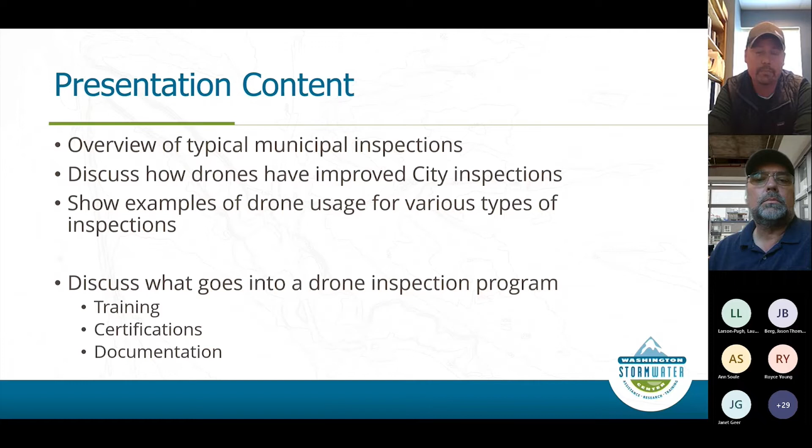So I'm going to talk about the first 3 bullets here, and Darren's going to go ahead and go into the details on what goes into the inspection program, since I'm not a certified pilot for the drone program, but Darren is.

With that, I can talk a little bit about some of the typical things we do. We use drones for improving our inspections for our construction stormwater general permits, our industrial stormwater general permits, and our municipal permit inspections that are required. We also have dams in the city of Port Orchard, so we use these for our periodic dam inspections, once for the annual and for anything periodic after large storm events to make sure we don't have any issues with structural integrity of our dams.

Like I'd said previously, we do use the drone on occasion for environmental issues. We've had some storm events where we've found streams downstream of the city that have had issues with inundation from sediments. We've partnered with local jurisdictions to fly the drone over a watershed to try and determine if there are point failures on slopes where there may have been a landslide, if there are issues potentially caused by development, if we've impacted wetland processes, or if there's been any issues in streams, et cetera.

We also use these for flyovers for capital project inspections, and it's actually a really cool tool to use when talking to your council or commissioners, because you can show them pretty quickly aerial footage of progress with capital improvement projects. We had some great ones that I didn't include in this presentation, sequencing a lift station, a major lift station that we installed within the city. We just kind of folded imagery over and over for progress on the project, and the council was very pleased to see that.

So traditionally, when we first started here, Darren and I started about the same time. When we started with the city, inspections required a ton of footwork. We would come out on a site, usually for a clearing limit inspection or pre-clearing erosion sediment control inspections. And it was muck boots, sometimes waders, depending upon the conditions, and lots of walking with notebooks and cameras in rain, sometimes in sun, depending upon the season.

What we noticed over time with the increase in the number of permits coming in, we were having a harder and harder time staying on top of our inspections. The NPDES municipal permit requires a minimum of a 6-month inspection for construction. And we were finding that the rate of change on these sites was happening so much faster than that 6-month minimum requirement. We were having to get out there more frequently.

Some of the stuff that we were helping ecology with for construction general permits was improved by these drone processes as well. We could send emails giving informational updates to the ecology inspectors to keep them in the loop on things that may or may not be progressing on these sites.

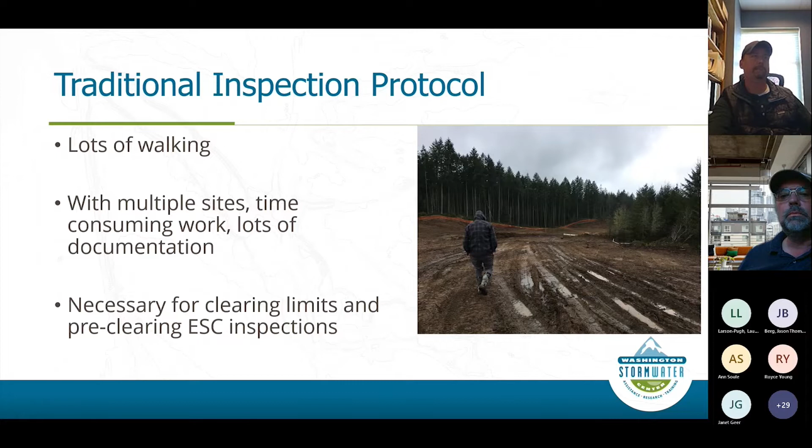So in a nutshell, using your drone can really help with improving your inspections and the data that you collect from them. We don't walk every time. We go out usually for clearing limits inspections, and after they clear, we'll do another site visit, either a drive-through or a walk-through. But on periodics for us, we go in and we use the drone.

I do need to give the caveat that a drone flyover does not substitute for a formal inspection for your municipal permits. You still have to go out there, you still have to document your field observations in the forms, and we use the Herrera documentation for construction inspection that is available online as well. I believe it's at the Stormwater Center, and I think there's a few other spots on the ecology website where you can get that documentation.

And we just changed the logos on it and updated a little bit here and there for what we include in those inspections. The cool thing is you can cover a ton of ground really quickly, and you can see subtle changes pretty easily from the aerial footage on the plat as a whole or the individual construction sites.

To give you an example, that 104-acre lot or plat that I was telling you about at the beginning of this usually would take us about 4 hours plus to do an inspection on foot, because they didn't want us driving on their site since we had the potential to create erosion by taking our vehicles on site in certain areas. So a lot of it was footwork—4 hours to 6 hours in some instances, depending upon conditions. The drone flight took that time down to 9 minutes.

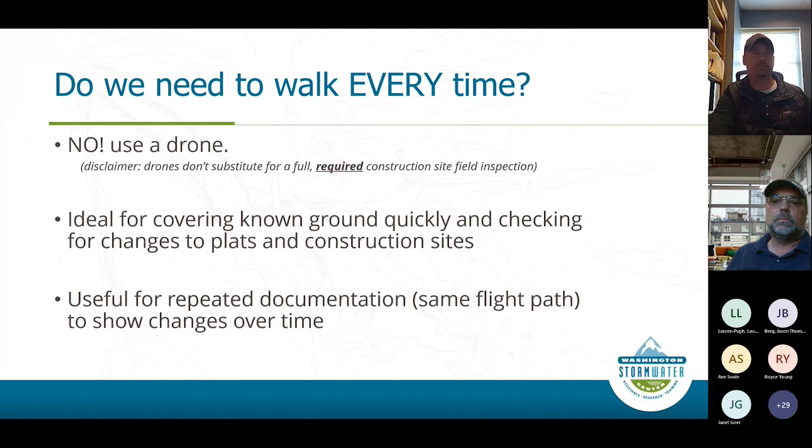So I've talked a little bit about how drones have improved our inspection program, but again, back to time use and efficiency, we can cover more ground quickly if all we have to do is go out and do a 9-minute flight on a big plat. We have several large plats with open ground right now that we can't always do those big site visits. So it helps us prioritize which ones need more frequent follow-up, which ones are doing really pretty good, and we can just let them do their thing.

It helps us with documentation because we can get those videos, we can get those photos. And the combination of individual lot inspections from the air really helps when we can do it at the same time as a larger plat inspection.

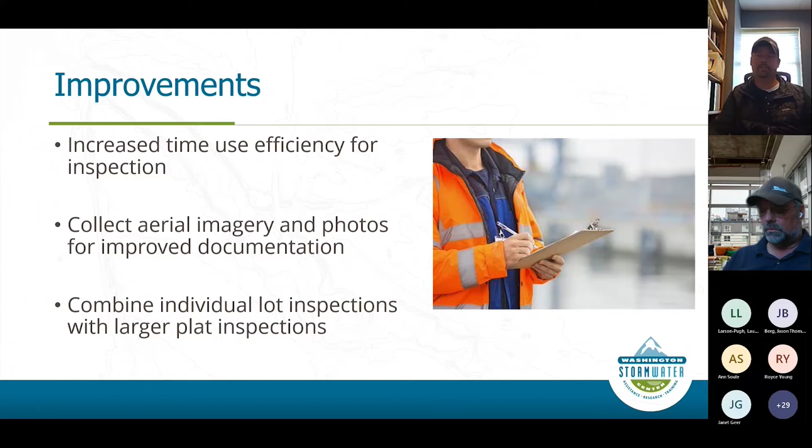A lot of these guys have switched on our individual lots with these types of plats to using pumper trucks, so they don't have to back their trucks in and out on these driveways. They just boom out and fill a lot of their foundations from the main roadway.

So for us, we like to see this because after the fact, when they finish up all these lots, they come in and do that final lift of asphalt, and we have a really smooth, seamless driveway and road system through this plat that looks good, isn't chewed up by development, and it's more beneficial for us in the end for the product that we get.

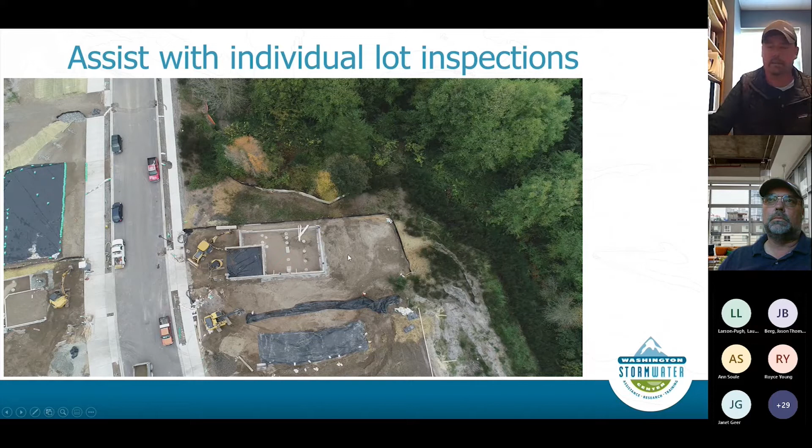This is that same plat. The image that we were looking at is around the corner here, but you can see there's kind of sporadic development going on throughout this plat. So for us to do a full plat flyover, it really gives us more of that holistic view on where they're at, what the phases are going in, what different phases are changing for the development here.

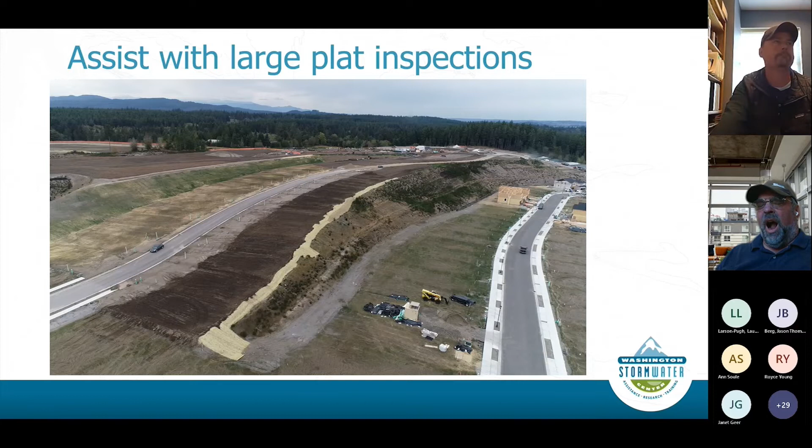And we keep that log to supplement those periodic inspections that are required by these permits. We also use this for outreach to the contractors to identify red flags.

I mean, you can see right here, we had a storm forecast for a couple days in advance of this, and these guys weren't able to get the water out of their pond to discharge it. But the rain events that came in, as you can see here, with a 192 NTU sample out of that pond, that's a big red flag for us.

So we got on the phone with these guys and said, you need to find an alternative method because your BMPs are not meeting the criteria for what's showing in your pond here. I mean, the prescriptive says if it looks like chocolate milk in your pond, it's pretty soon to come out of your pond as chocolate milk to the receiving water as well. So they had to do something.

What we found out after the fact with these guys was, based on their construction activities, their source control was - they did a risk assessment on this and they let their source control kind of lapse.

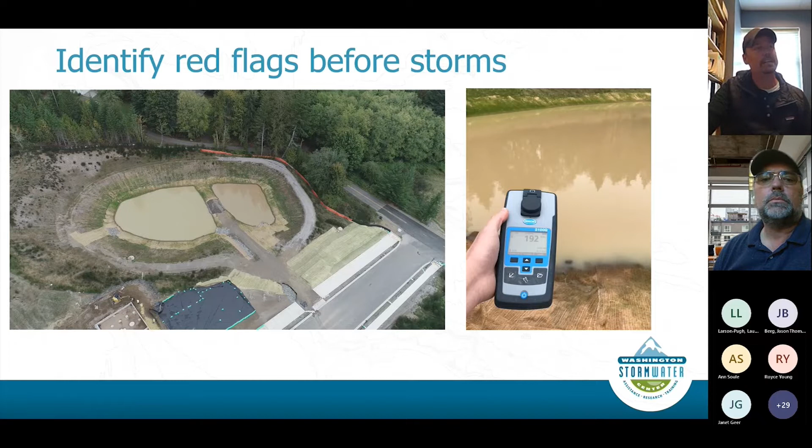We had a small rain event that incorporated a bunch of turbid water into these different ponds. So what these guys did was they kind of panicked and said, what do we do? We told them the menu for the stormwater manual has lots of BMP options, but in a situation like this, with the size of this plat, you guys may want to do some kind of filtration system. So they went out and picked up a Chitosan system within a couple of days from United Rentals, and they were able to get it on site to manage the water in their ponds using treatment to discharge and meet the requirements. So for us, it was really a useful tool to get in front of problems.

We did talk with them fairly frequently to maintain where they were at. Their treatment staff was keeping records of all their treatment processes, when the pumps were running, et cetera, so we were able to check on it frequently. After the wet season, they were able to amend and fix their source control issues, and the problem has abated itself.

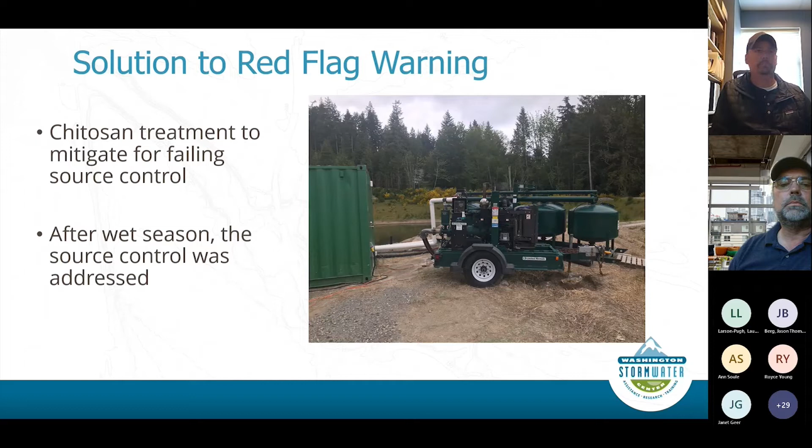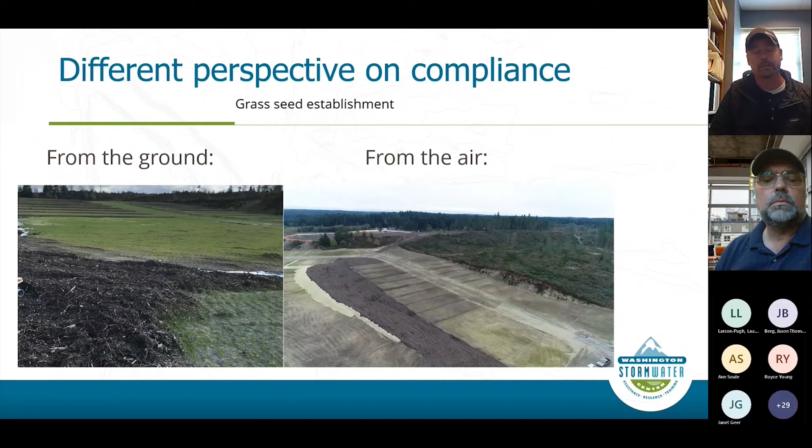One of the other benefits of using these drones is perspective. You can see in the picture on the left, when we're on the ground and get out of a vehicle looking at the different lot layers here, the different pads for these lots at rough grade, it looks like that grass isn't too bad. But when we get the drone up over the top of it, you can see that it's much patchier and more sparse than what we can really see without getting out there and walking each individual lot. So having a quick flyover really benefited us to say, hang on guys, you need to address this. We're going to probably need more hydroseed or an alternative BMP to get you guys in compliance with where you need to be.

Some of our other types of inspections we were talking about at the beginning, the dam safety inspections. This is one of our registered dams in Port Orchard. It's a stormwater pond, but it meets the criteria of a dam because it has the potential to withhold 10 acre-feet of water in its design. By that, it's considered a jurisdictional dam by ecology, so we have a whole different protocol for how we manage and maintain this facility, and we have to do these inspections frequently. There are several other jurisdictional dams within our city, but most of them are managed by private facilities, and they aren't high hazard dams like this one.

As you can see here, we've got a housing tract that was built in a different jurisdiction just downstream of this wall. The water runs off stream here to another receiving water downhill. But in the event of a failure, we have to have a lot of contingency plans to protect this downstream plat from issues that could occur here. So with high risk comes a lot of inspection, a lot of engineering, and a lot of oversight.

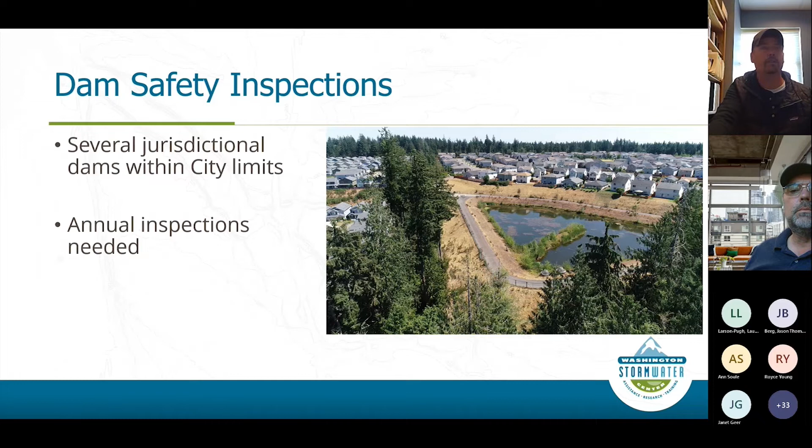For the dam safety inspections, I can send ecology an overview with a close hover over the top of our two control structures, our inlet structure here, and our secondaries along this berm. You can kind of see one here and one here, showing the integrity of both berms. So they can see not only are we submitting our inspection reports, we can also submit these documentations so they can cross-check it against what we've kept in our notes. It's been really helpful for us with these submittals.

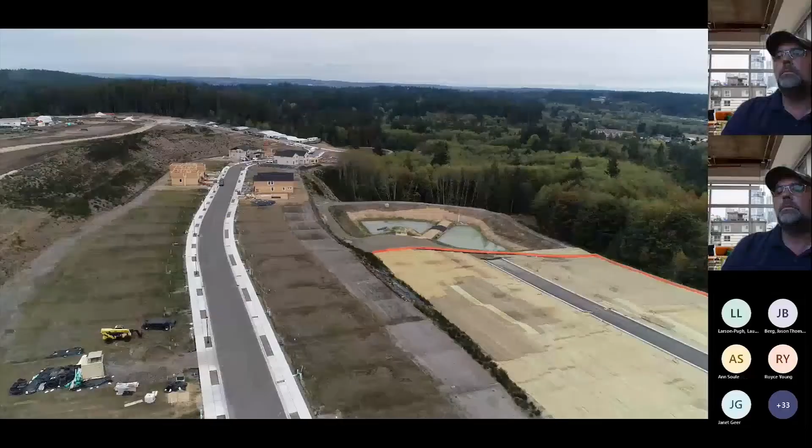Let's take a look at one of those large sites we were just talking about. This one might be a little slow moving, and I apologize in advance, there's a bit of back and forth at the beginning as we figure out which part of the plat the drone is located at before we take the flight. So we'll see how it goes, and I hope people can see it without too much skipping.

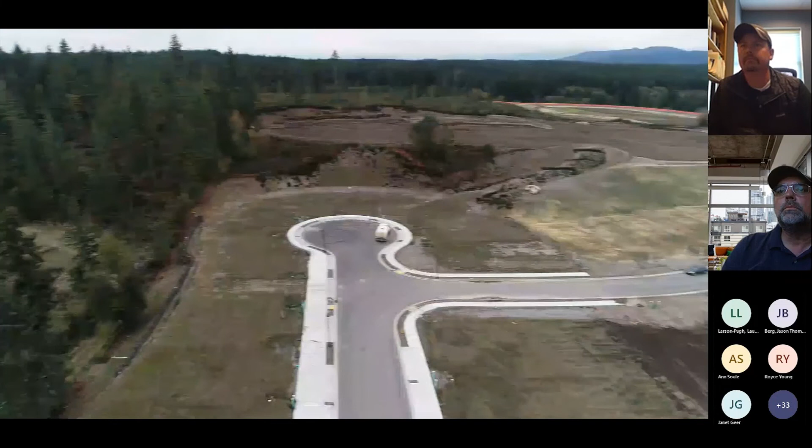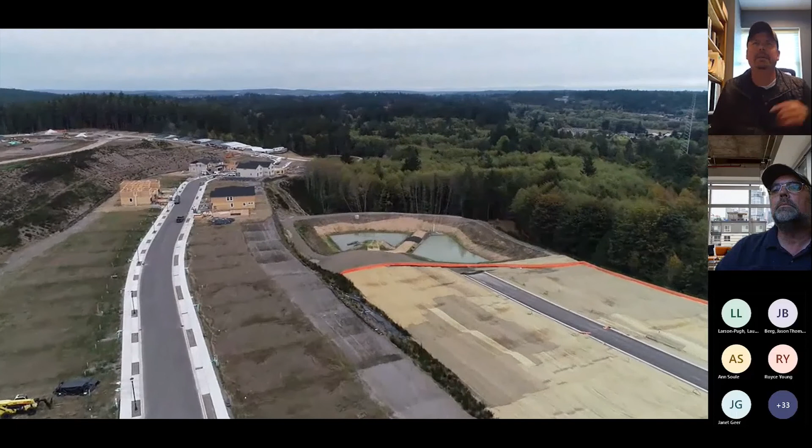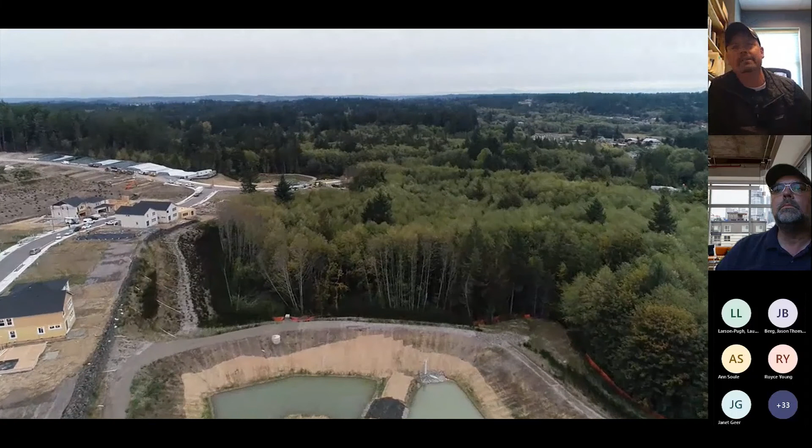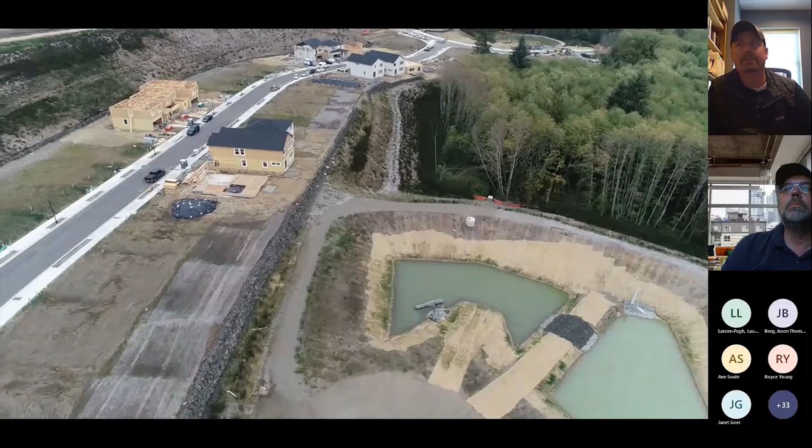Darren will put the drone up in a usual spot, and it depends on where on site we are, but we try to start at the same location. For this flyover, you can see there were a lot of open areas where their source control was lacking. That pond, when we measured it, wasn't as bad as the others for turbidity, but it does appear that way, so we still contacted them about it.

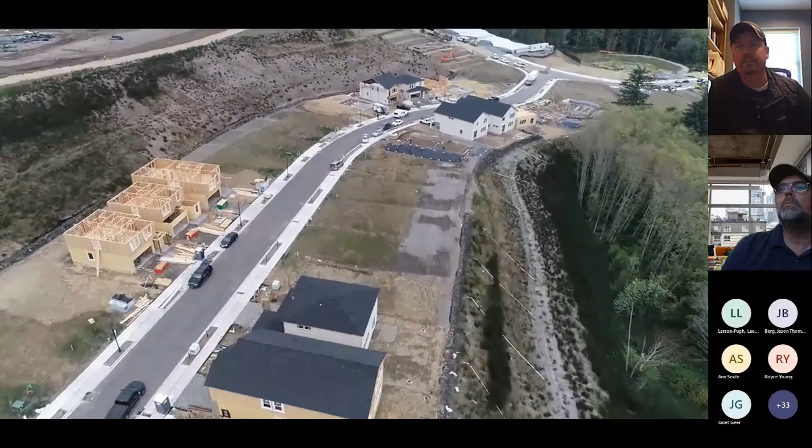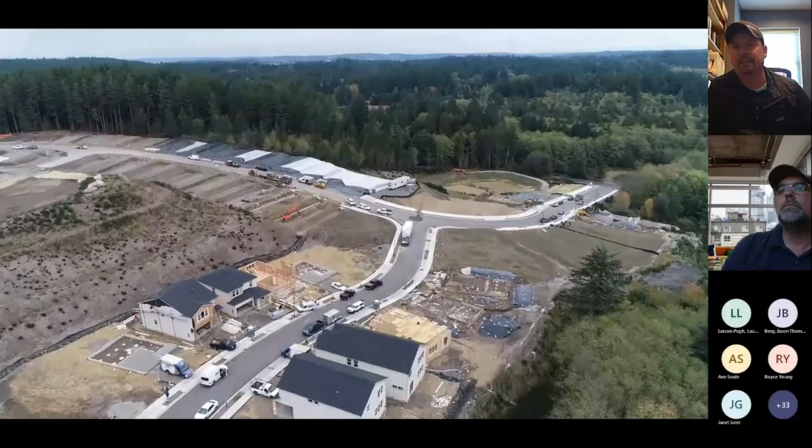Here's another example of a flyover on an individual site. You can see construction entrances, and they've taken the silt fence down at these spots because those slope towards the road. They had wattles set up near the sidewalks for containment at those two lots we just flew over. You'll see interspersed BMPs throughout these different sites.

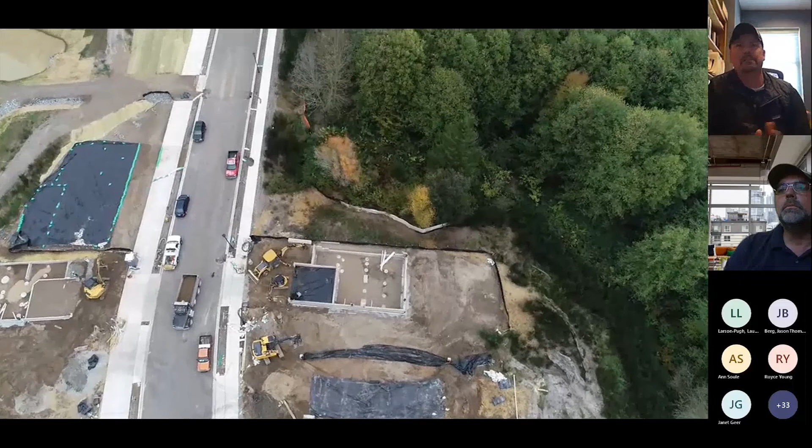We tend to not allow straw as a BMP on anything over about 5 acres. So for a large scale plat like this, they've got to use a different alternative, which is why you're seeing so much blanket rolled out and plastic and stuff like that. Individual lots, we will allow them to do straw as a BMP, but we've had really bad luck with straw because wind and weather tends to move it all over the site, and it's just not effective on large plats like this where there's a good wind fetch and it might move materials.

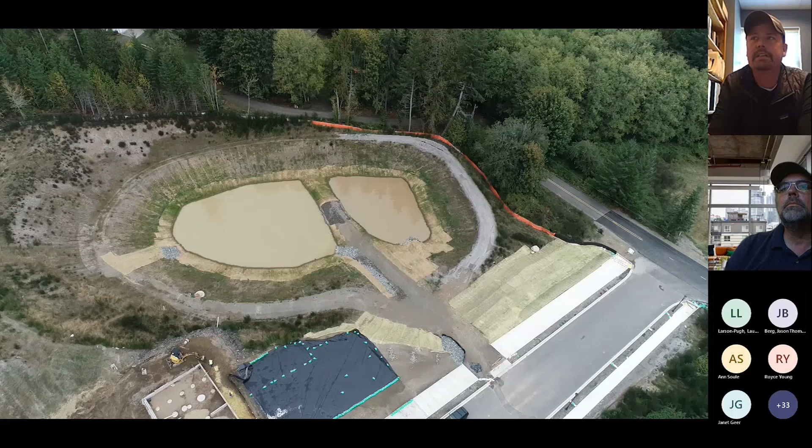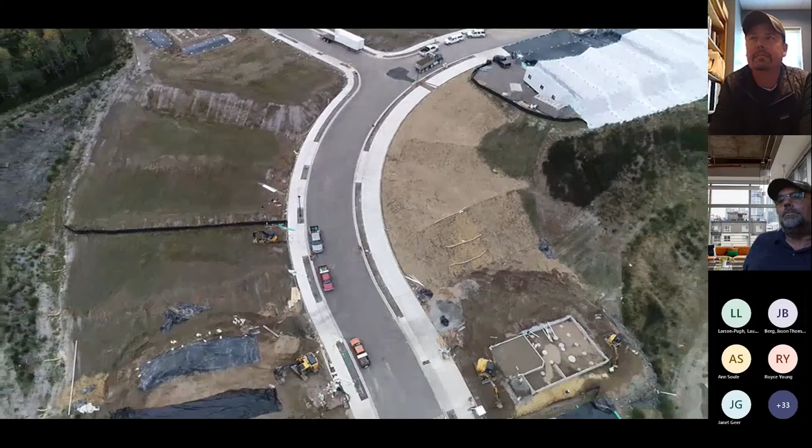So there's the video showing that footage of the pond that was the red flag for the outfall. What these guys ended up doing was taking all of their ponds and getting big pumps to pump them down to this lower pond here for treatment. They did a controlled flow into the pond we're hovering over here.

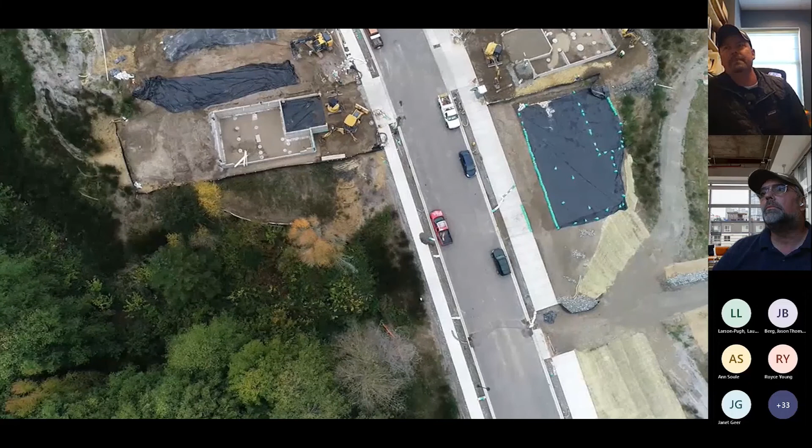All their turbid water came down to that pond, and then they treated it there with the chitosan before it was discharged into an adjacent wetland complex, flow controlled and everything else adjacent to the plat.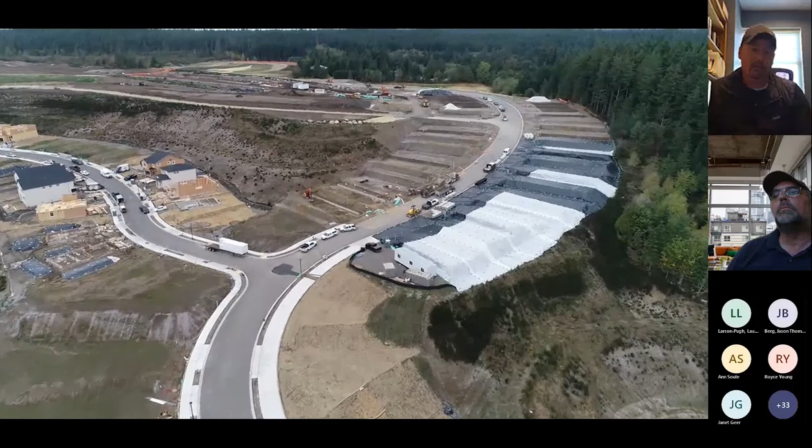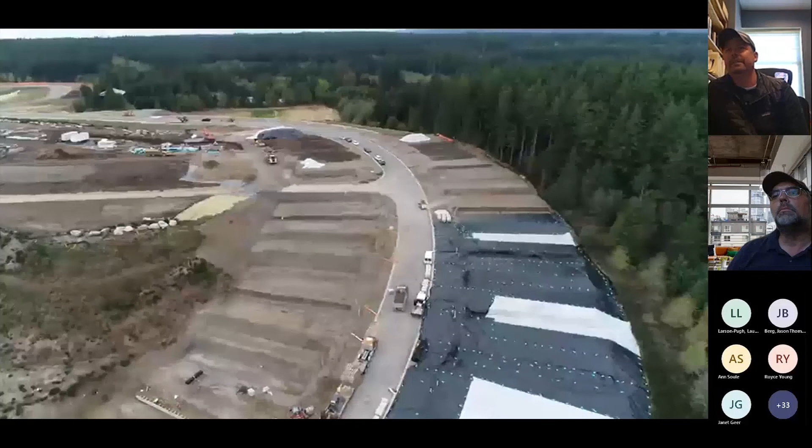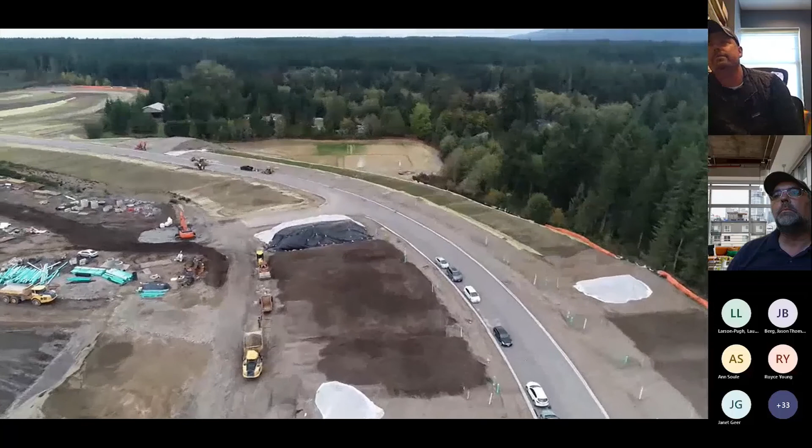So there's a lot going on that we've got to keep track of with these different sites all at the same time, between survey grade changes, the consistency of what's happening on the roads, and track out management. You can see there's a lot of people working out here and a lot of activity.

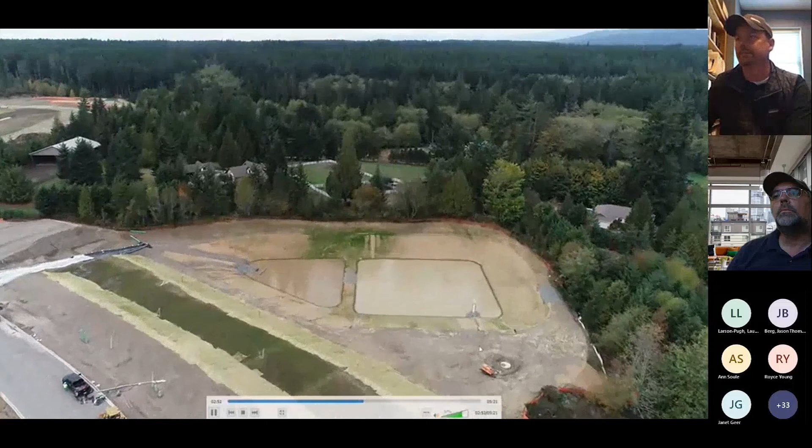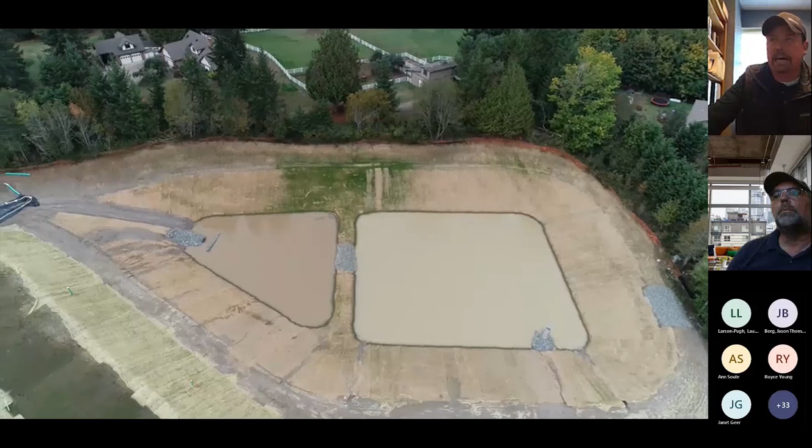You can see the orange pump here that they were using for moving water out of this facility into the other pond down towards the beginning there. But there are 4 large ponds at this plat, and they're big, about 8.5 acre feet each. So we had a lot of work ahead of us to stay on top of what was going on here.

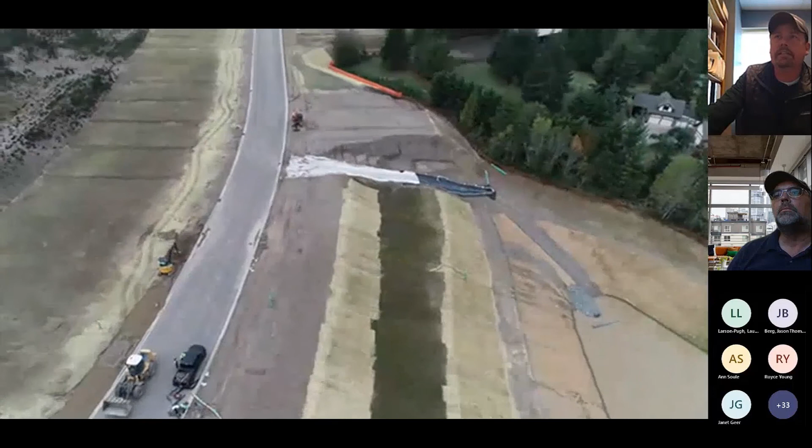These guys had an incredibly aggressive schedule to be able to build this plat out and keep it stabilized at the same time. So the drone really came in handy for us to be able to cover sites like this. And like Darren was saying, we've got 1, 2, 3, 4, or 5 plats about this size in town here.

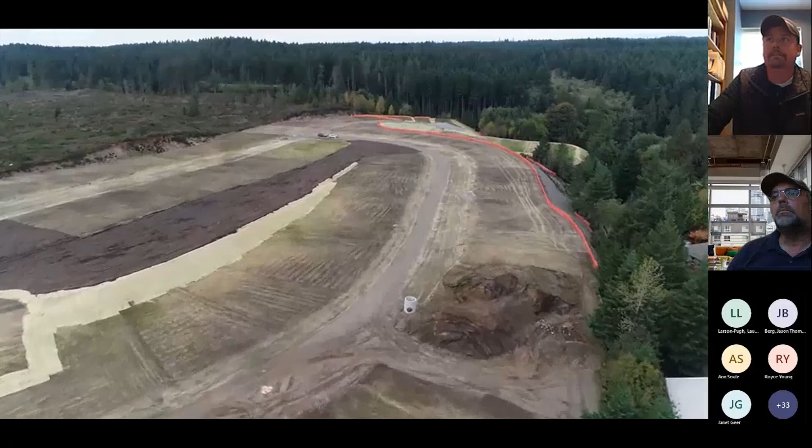I don't know if you can see, but my dogs get to go on inspections with us sometimes too. They're out there doing grass coverage. No, they're not, they're just playing.

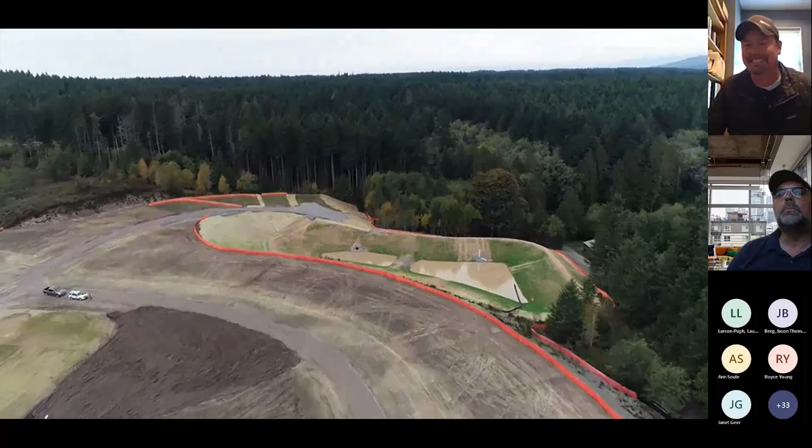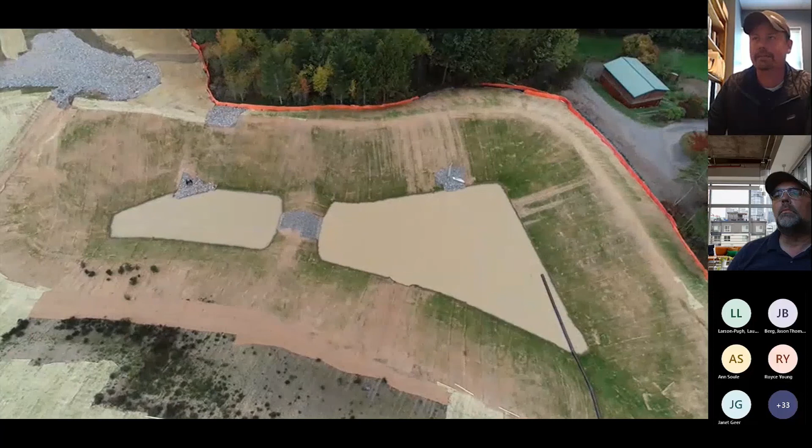Here's one of the back ponds that was really hard for us to get to before they punched the road in. Now we can get to it fairly easily with the drone, but now that they've gotten the road grade established back here, we were able to drive in and actually set up for our observations.